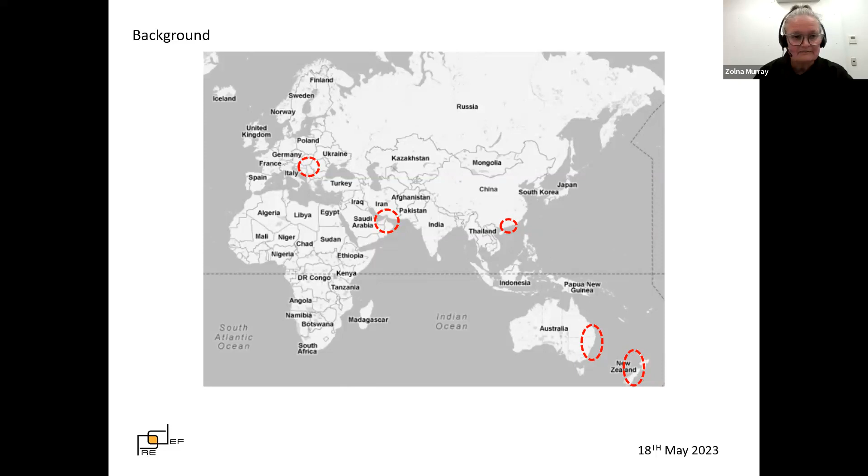I have been fascinated by digital model-based technology from very early on, so early 1990s, and have been promoting it ever since. Over time, improvements in technology have allowed us to create better and more detailed models, a trend that's somewhat hindered by the industry's doggedly unwillingness to wean itself off drawing-based processes.

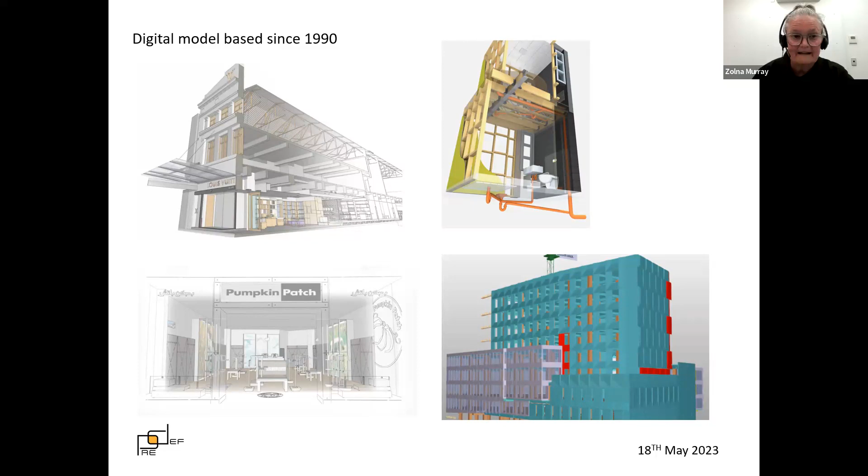We can also see that the burden of creating these increasingly more complex models, as well as managing them, still falls largely on a small sliver of the industry, usually the design consultants, likely some of the contractors and their subcontractors. The part of the industry that's seemingly less involved or even interested has been the manufacturers and suppliers segment.

Sure, some offer branded digital objects and families to use in modeling packages, and others create specifications that fit industry standard documents. But their overall impact is small on how communication is performed across the industry.

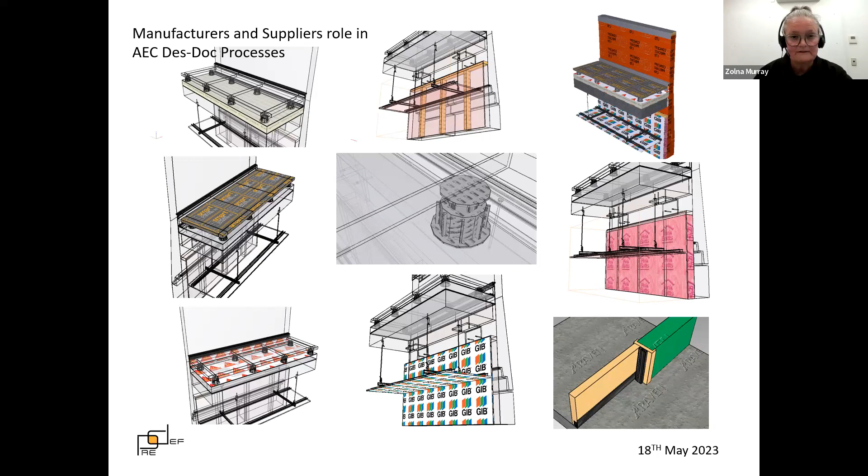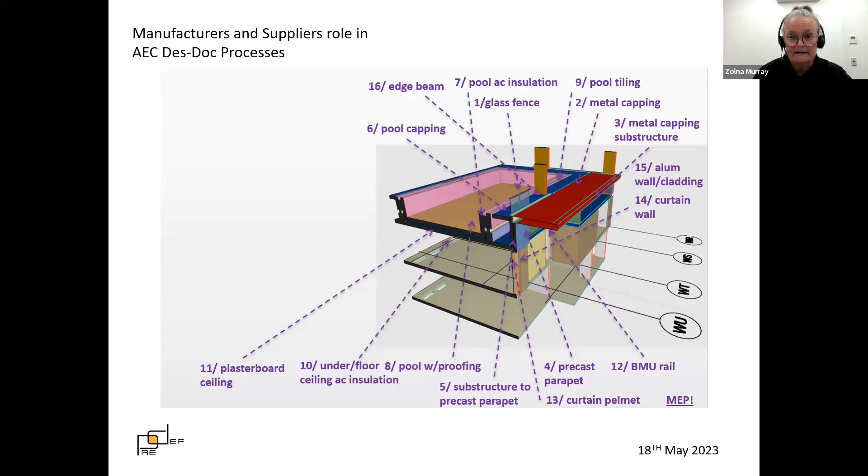I have long believed that this should be changed, and given the right environment, they would get actively involved with positive contributions. After all, any detail you pick up on a building is likely made up of many elements, all created by companies with vested interest in them. They also have the best knowledge of how their products and systems work and how we should direct others installing them.

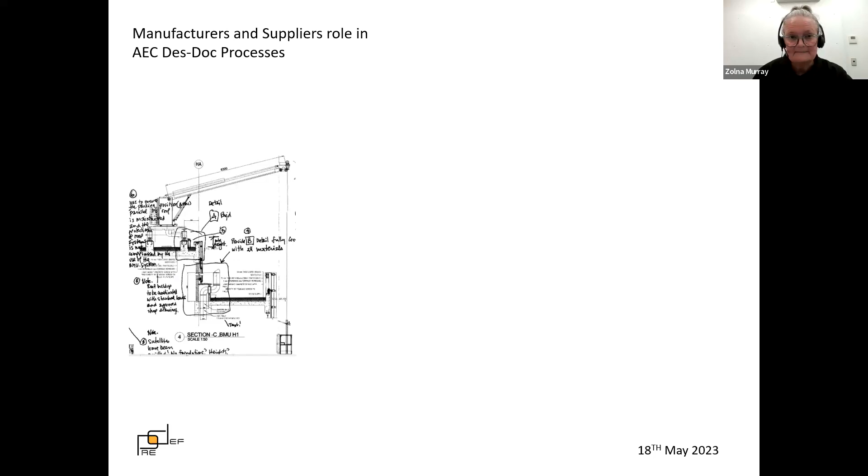Contrast this with the mainstream practices of producing building documentation, largely drawing-based still by consultants, often struggling with scope limitations and mismatched skill sets. Or even with common contractual situations where large chunks of buildings are delivered as design and build packages, even when the main setup is that of a design-led project.

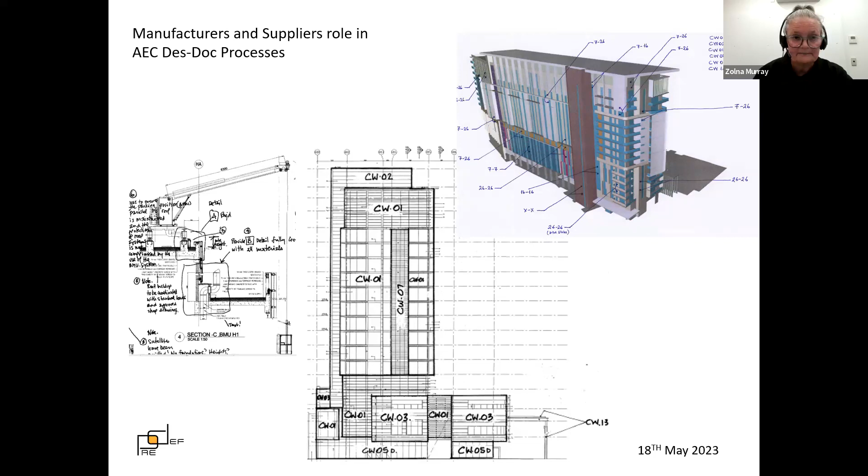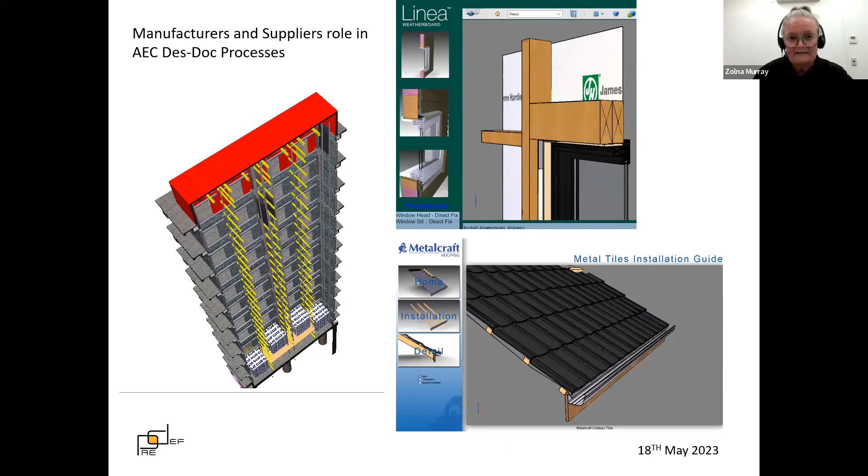While I personally have made many attempts during my career to involve manufacturers and suppliers in the building documentation processes, only the emergence of Revizto made this possible on a wider scale. I came across Revizto just over 2 years ago, and since have set up and worked extensively on 3 Revizto-based projects in New Zealand and Australia.

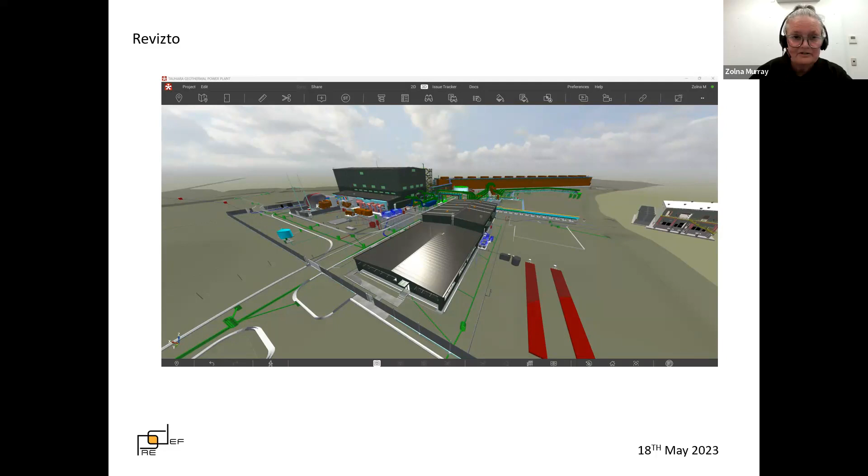This was not my first experience with a cloud-based, model-based, multidisciplinary coordination platform, but it caught and kept my attention for several reasons. The first feature is its interface, simple to a fault. It includes 2 buttons that I believe are pure gold: one is the home button, the other the view button. In a well set up Revizto environment, these 2 buttons can make almost anyone a competent user within minutes.

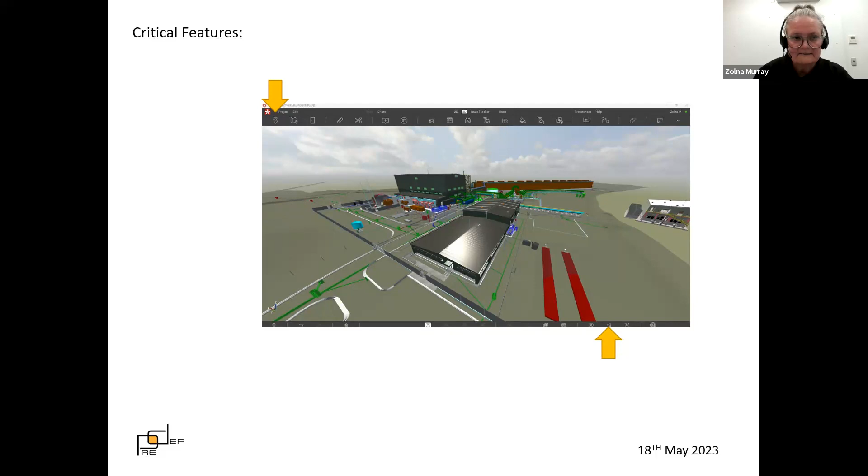For a long time, effective model viewers were undervalued, yet accessibility to models should be a number 1 priority if we are to take models in construction seriously. The second quality of the platform is its ability to manage huge models and make them available on even mediocre devices.

Amalgamating models of pipes, rebar, and thousands of fixings will no longer break the system down. Revizto carries them well. And there's a third one, something that comes from the way it's used on many projects, where models are uploaded, often automatically, in weekly or fortnightly intervals, sometimes even daily, as opposed to limiting model exchanges to design stage milestones. This methodology makes project development more fluid.

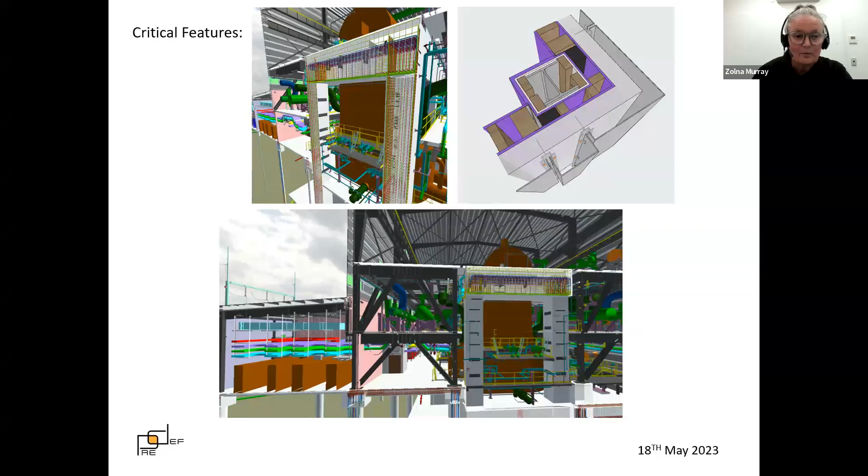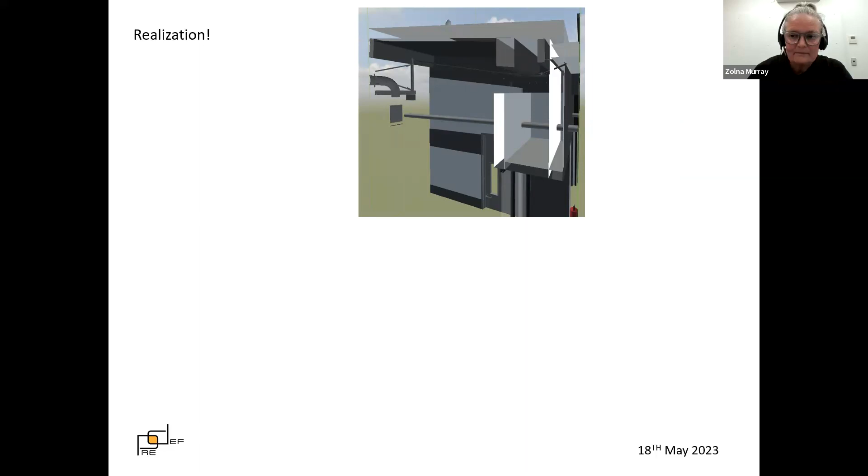Now, all this good stuff, unfortunately, brings some new challenges. Viewing models from the construction end, even good design models look underdeveloped, incomplete. The LOD stuff we've been working on for the last decade or so is somewhat underwhelming when one is to construct these buildings.

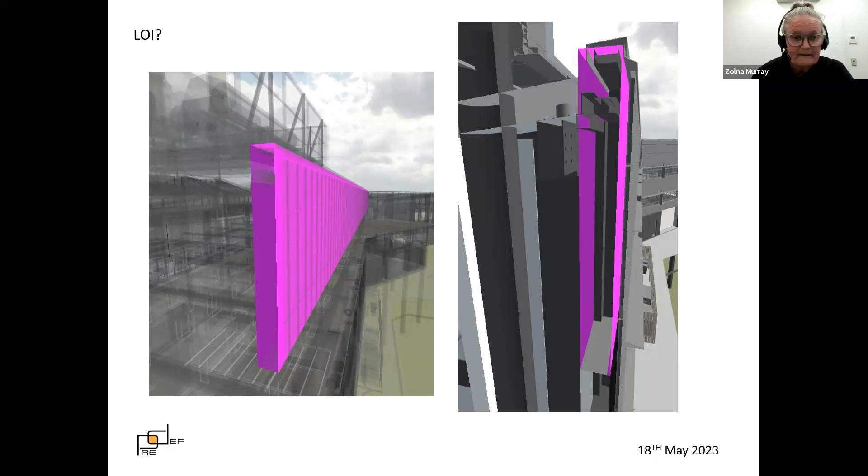See, a wall may have a long list of parameters attached to it that is good for scheduling and data management, but the people on site ultimately need to see all of the bits that make it up, so everything can be fixed to the correct place all around its perimeter. Graphics beats LOI.

The obvious solution to the incompleteness of design models is in preparing good shop drawing models. They should fill in those gaps and provide more comprehensive models with appropriate granularity for building. Now, our experience is that even on full-blown mandated BIM projects, shop drawing models tend to be non-existent, late, poor quality, and/or of low detail.

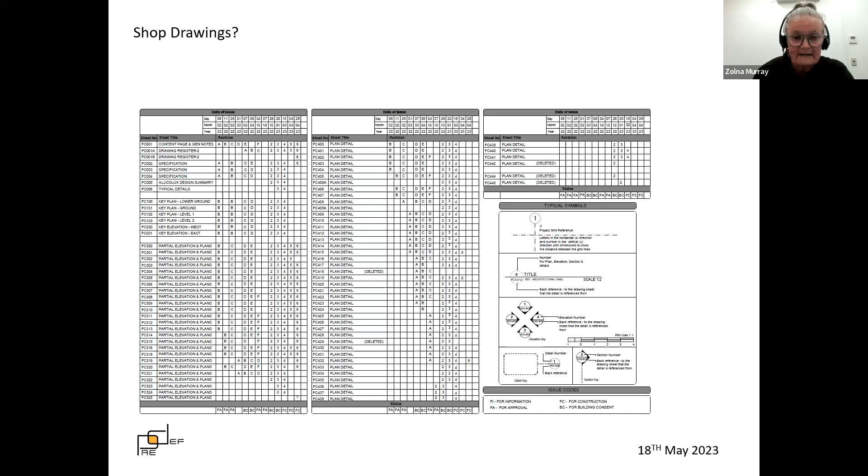Here, you are looking at one set drawn fully in AutoCAD 2D on a very recent project.

So could there be an opportunity for the manufacturers and suppliers segment of the industry to come on board and fill the gaps, enhance the models, and make the process more effective? After all, someone makes these raw or assembled products and has a stake in where and how they are used.

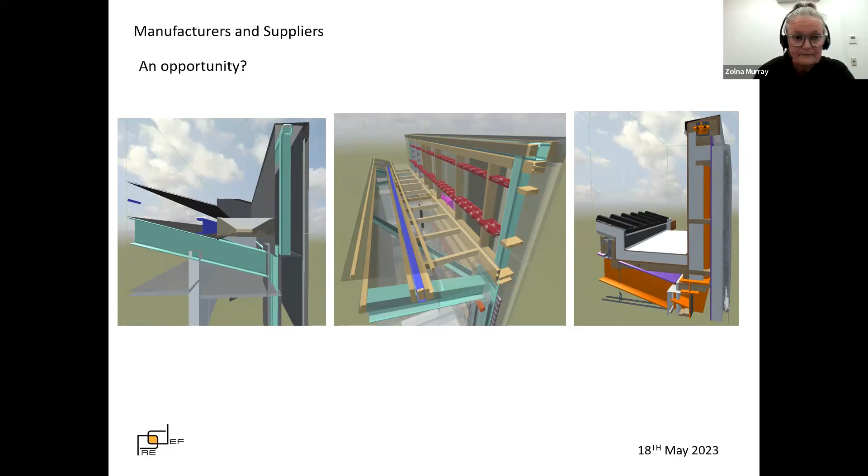Let's examine a couple of practical examples of what this inclusion of manufacturers and suppliers data could look like. First, product libraries.

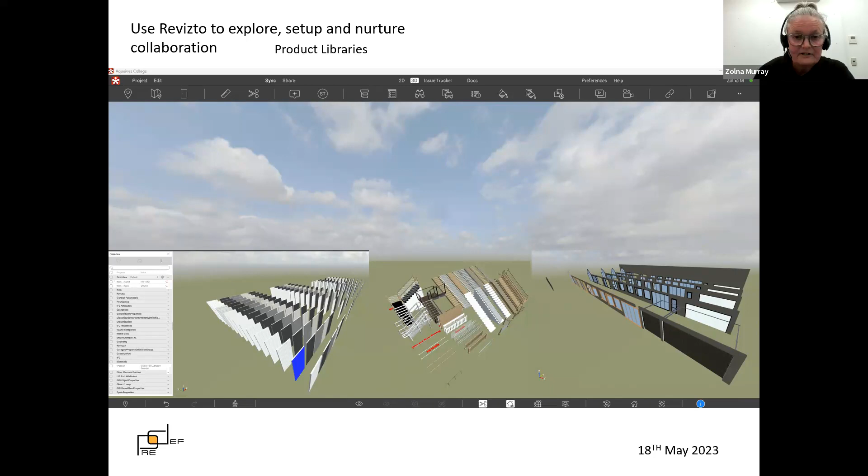We could create spaces within the Revizto environment where manufacturers and suppliers would exhibit their own representation of model material. All stakeholders could see these products and services in the environment they work in and assess both the products and their representational qualities. Visual filtering could help with showing only relevant products at a time and at different design and construction stages. And custom properties could link these to other databases.

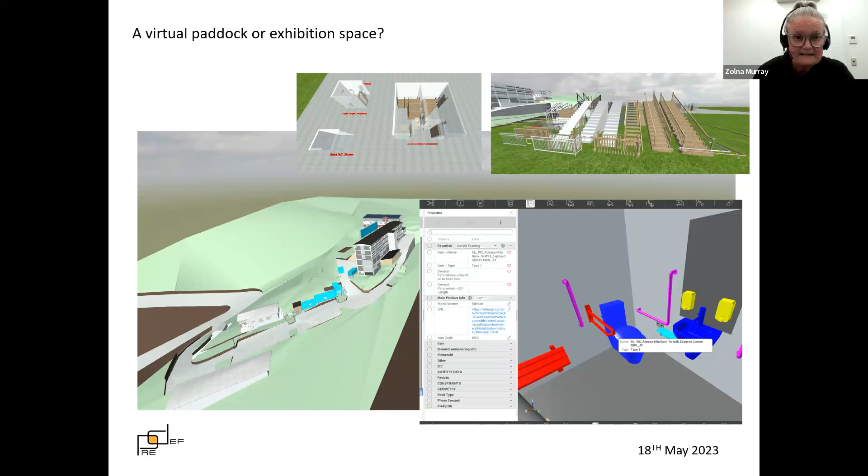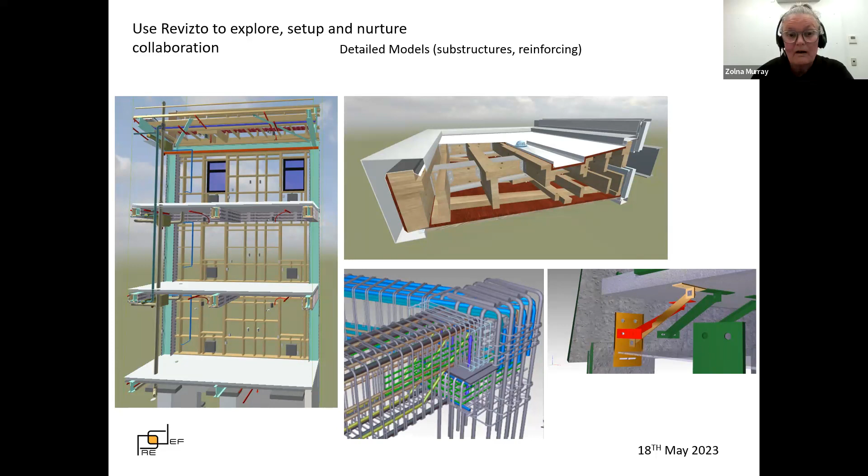If product libraries were present from early on in projects, then when we move on to detailed design stages, manufacturers and suppliers could sponsor the modeling of substructures, reinforcing, fixings, flashings, and other bits within models traditionally left off due to model size limitations or lack of product understanding.

Revizto's appearance profiles allow for colors and branding to change from view to view, differentiating model and product ownership and design responsibilities.

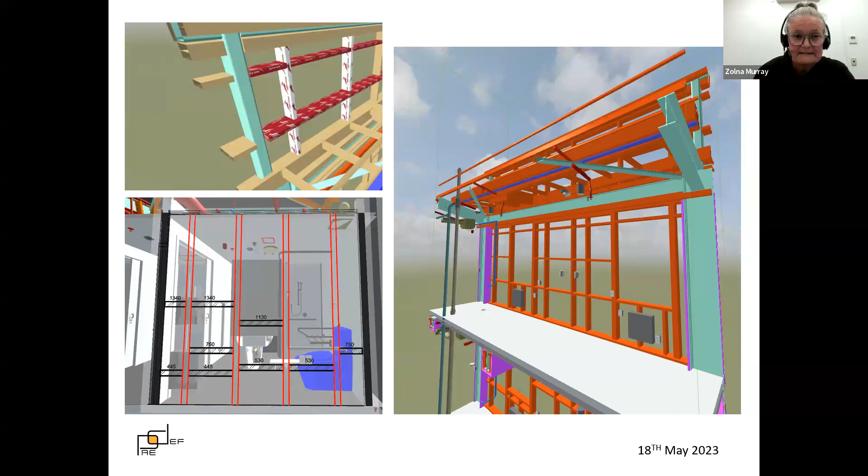Another application is what we name syndicated 3D detailing. Here, the manufacturers and suppliers' models are no longer limited to singular products or systems like shop drawings usually are, but jointly provide full details that are precise, smart, buildable, and can be accessed straight in Revizto, fully associated with their host models and 2D representations.

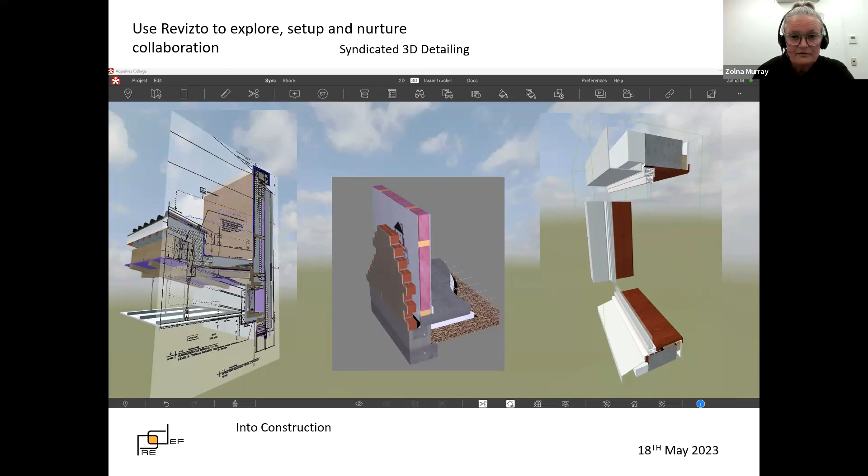Creation and management of syndicated 3D details requires a distinct party to be assigned these tasks to. Can be part of either the design or construction teams, or an independent consultant. Contemporary procurement and delivery methods allow for this to happen. Syndicated 3D details can significantly reduce costs of producing both models and associated traditional 2D consent drawings, as well as reduce buildability risks.

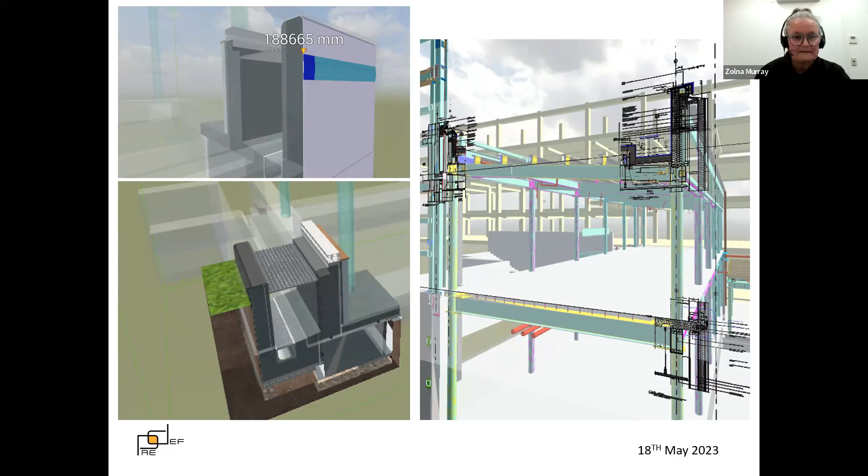Visual scheduling could be used even when manufacturers and suppliers do not provide their own models but add additional parameters to consultants' models. So takeoffs, time sequences, maintenance data, or other smarts can be incorporated. LOI combined with good LOD can reduce reliance on traditional specifications and/or manuals.

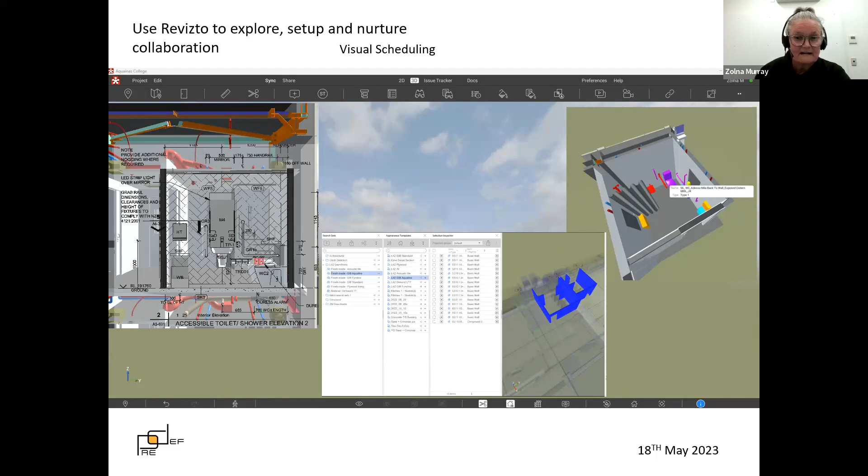The last planner is a scheduling approach used by many construction companies. Using Revizto's appearance profiles, weekly look-ahead scenarios can be colored according to their trades.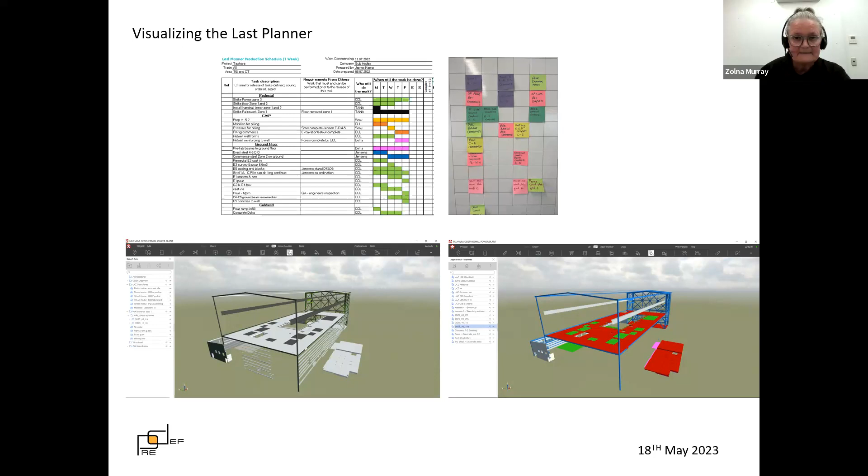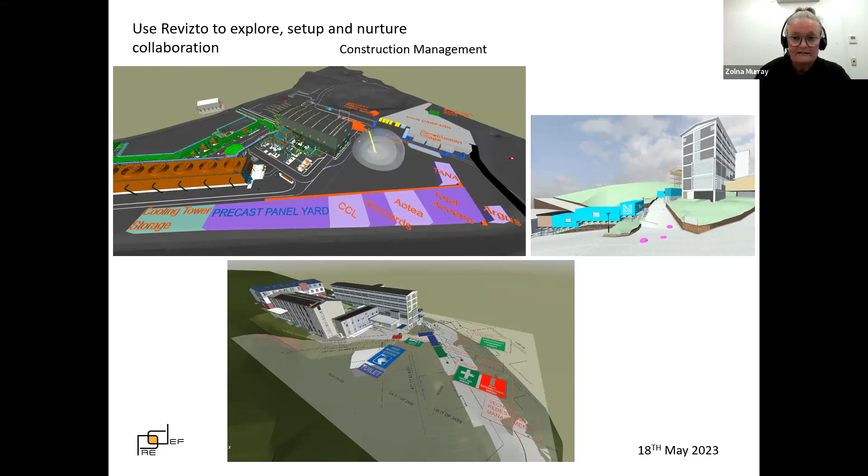The last of these five examples is construction management. It may be a surprise that we listed here. After all, there are many applications specializing in this field. Opening up Revizto projects for models coming from the construction management or site management supporting market will definitely enhance overall delivery. Think here cranes, scaffolding, temporary works, and other contractors with similar scope.

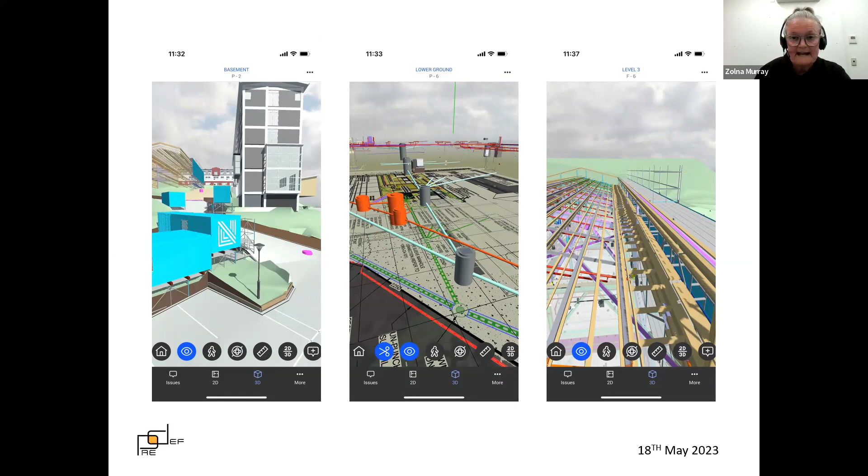Site instructions, task analyses, health and safety discussions all can be more meaningful when the critical data is streamed straight to the participants' phones.

Now, looking at these examples, you could say, well, nothing new here. All of this has been possible in modeling packages. Why not just stay there?

Now, we believe these approaches are not mutually exclusive, but the Revizto advantages are huge. The main one being that it is such an easy-to-use platform where models can be accessed, assessed, and added to without the need to maintain skills and own multiple forced-upon software packages, but focus instead on those tools that are in line with the participants' own production and systems.

I also think that we've become somewhat conditioned to this idea that our work must all happen in one application, or at most in a family of packages owned by the same company. This could make us get bogged down and unable to recognize the potential of mixing and matching tools to our needs, rather than those of the provider we have sworn allegiance to.

I trust I presented a list of viable approaches of including manufacturers and suppliers in building design and documentation processes. But the question is still there: what are the benefits for those manufacturers and suppliers themselves actively being present in Revizto projects?

Let me list a couple of those points. First, awareness. They can see what projects are under development and pitch their products appropriately. They can follow trends, make calls on designer performances and contractor behavior.

Second, presence. Their products and branding can be in front of those that make buildings happen. And the third, risk management. What better way to ensure their products are used in appropriate places and installed the right way than assisting the documentation process firsthand?

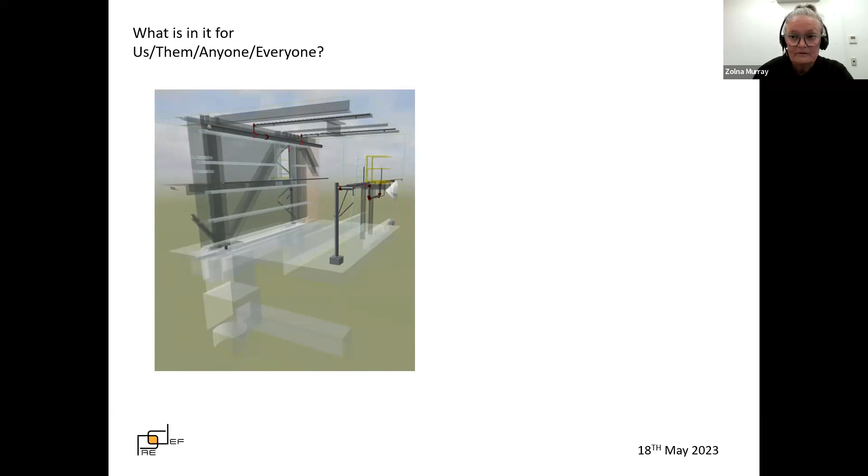This industry has been thriving on ambiguity. Thriving, but also self-destructing. I see the answer in modeling, early, well, to as much detail as possible. All the effort into arguing why we shouldn't model or what we should and should not model, I believe should be focused on modeling better, to more detail and accuracy.

With Revizto, you can manage those models easily and filter complex data for everyone to understand. You can also offload some of that burden of modeling to those that would love to help so that they can get to the table early, the project early.

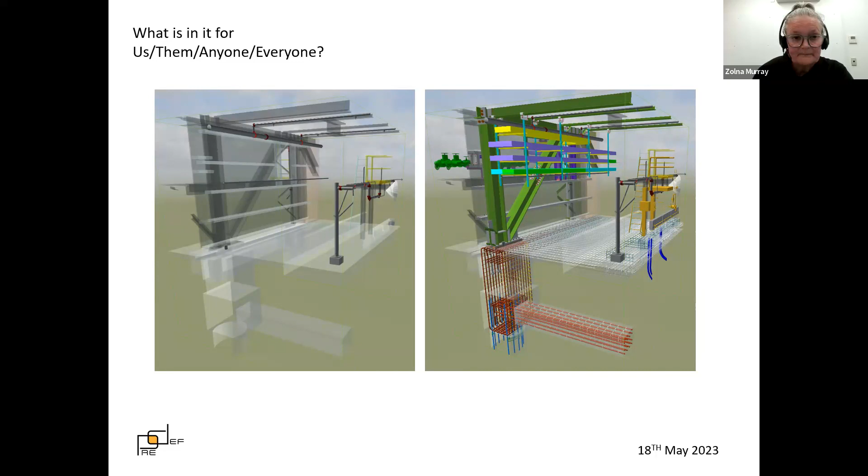So redesign your relationship with the manufacturers and suppliers segment of the industry. In summary, there is a shift in modeling requirements these days. We can model to a higher level of detail, and those models can be accessed easier, managed easier too. However, we will lose the buy-in of many if those models aren't good or useful enough.

Manufacturers and suppliers are likely to prepare to join the game in a more active role, but we need to talk to them, plan early, involve them in time. Be prepared to challenge current practices and redefine the project environment.

I believe these efforts combined will lead to a win-win-win situation, something we don't always aim for in the construction industry. Designers, contractors, and manufacturers and suppliers can all be benefiting from it. Consequently, the AEC industry as a whole will improve.